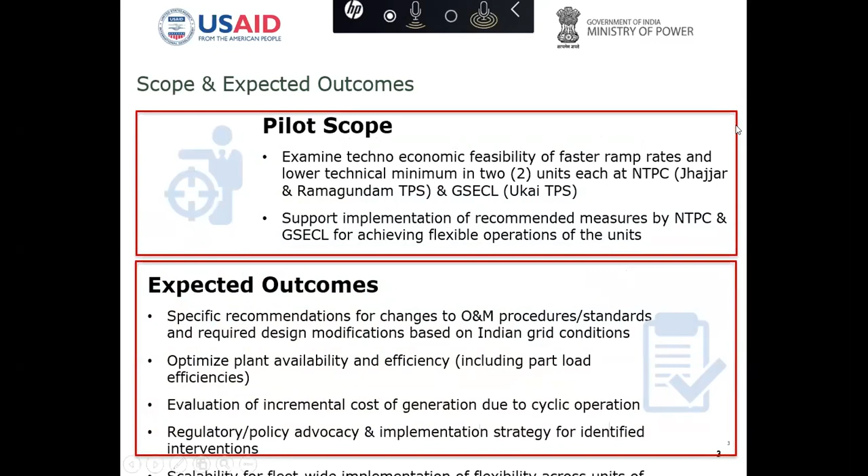We started the pilot long back in 2017. The scope of the pilot was essentially to look at the techno-economic feasibility of a couple of units at NTPC as well as GSECL. We identified a 500 megawatt unit at Jhajjar and a 200 megawatt unit at Ramagundam for NTPC, as well as a 200 and a 500 megawatt unit at the Gujarat State Electricity Corporation, that's GSECL.

The objective was to look at how these units have been run over the last 10 years, what damage has been inflicted because of the operational procedures taken up by the teams. And going forward, if these typically 200 and 500 megawatt subcritical units are subjected to flexible operations, what kind of damage is foreseen? What are the costs associated with those damages? And in a regulatory environment, how can we address those costs for the utilities. So that, in a nutshell, was the overall objective.

And then, of course, coming back once we find the recommendations, we had to support NTPC and GSECL, which we have wholeheartedly done with fantastic support from both utilities over the last 3 years. This webinar, in fact, happens to be the third webinar in the series of this pilot.

As I mentioned, the outcomes were primarily related to what kind of operational changes you would foresee in running the units during flexible operations, because that's something Indian coal-based units had not been subjected to so far. Going forward in the near future, when you have a large ingress of RE capacity into the grid, coal-based units would be required to flex up and down, maybe do a two shifting also during a week. So that's where we looked at the kind of procedures that would need to change.

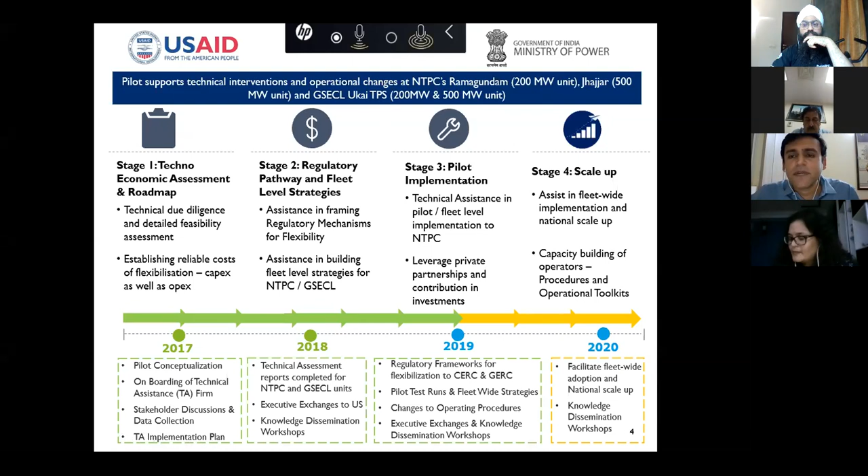Anuj has already mentioned that this trial was a 3-year journey. We started during February '17, and then this MOU was signed, and we have shared 10 years database with USAID as well as Deloitte team. That was analyzed by the Intertek team, and Mr. Doug and one more senior person analyzed all these things.

But initially, what was the issue with us actually? We are not confident how to run these units at low load. Our technical minimums are almost above 70% for all of our units. And normally SLDC or the load dispatcher also don't advise us to go below this.

So this was, we can say, a test we have not carried out in our routine operation. And now for the last 2-3 years, we have seen so many changes in the grid operation also. We are facing so many difficulties because of this highly erratic tendency of wind.

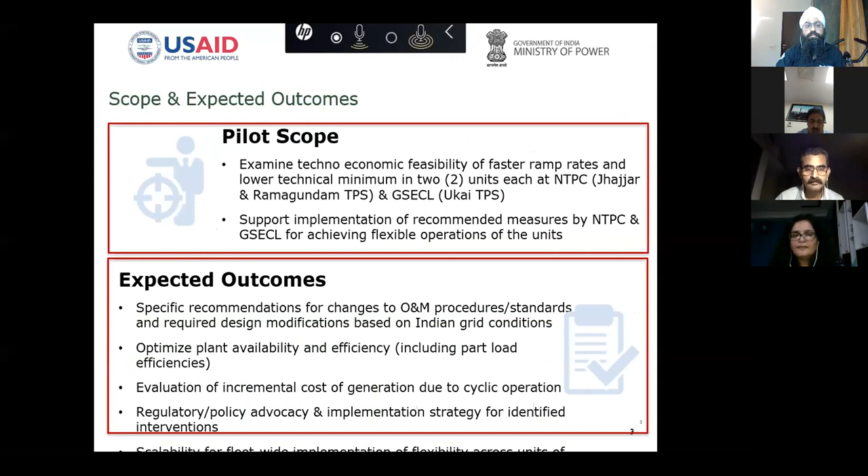All this exercise has developed a lot of confidence in our people that we can run this unit without oil support up to 40% and 55% loads.

One more thing, the Deloitte team also made a presentation to our regulatory officers regarding the damage these machines are incurring on account of these fluctuations, and what should be the compensation. It was a good presentation, and the regulator agreed that they will consider this compensatory mechanism in our ensuing multi-year tariff petitions. This was very good support from their team, so that we can quantify the losses and how we can get the compensation.

We were not even aware of the quantification, how much losses we are incurring while load following or start-stop operations. With support from USAID, Deloitte and the Intertek team, we were able to quantify these losses and put this up to our management, that we are incurring so much losses in this process and we have to avoid this. So again, this was a very successful exercise for us.

We have developed a lot of confidence and awareness among our people. And once again, I thank all of these people who are associated with and who have guided us in this exercise. Thank you.

Thank you, Monali, and thank you Mr. Michael, colleagues from GTG, all the participants, Mr. Banerjee from NTPC, Mr. Gandhi, and all the colleagues from GSECL, from NTPC, I think from Adani, Mr. Nikhil from Intertek, he's also there, I can see him. So good evening, everybody. Let me upload the presentation.

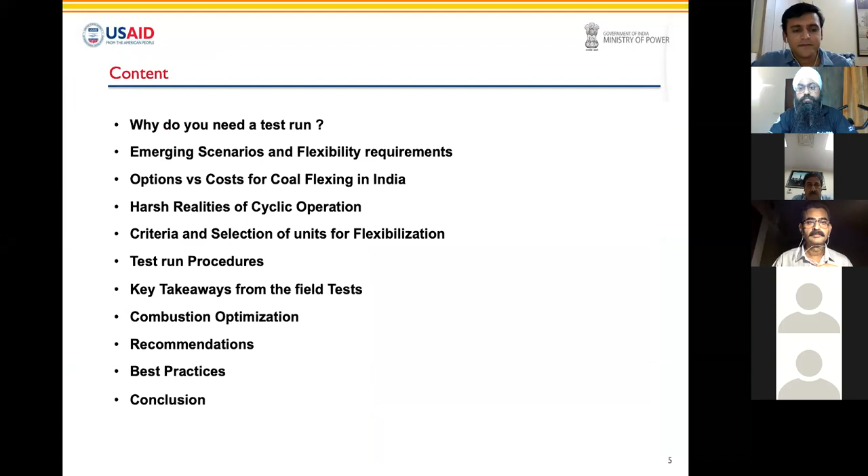Okay, these are the things that I'll cover - why do we really need a test run. Because there are a lot of questions. Even before the webinar, I received a lot of questions from I think 4 or 5 different people, and I have tried to answer all of these, and whatever will be left, we'll answer in subsequent discussions. I will send it personally.

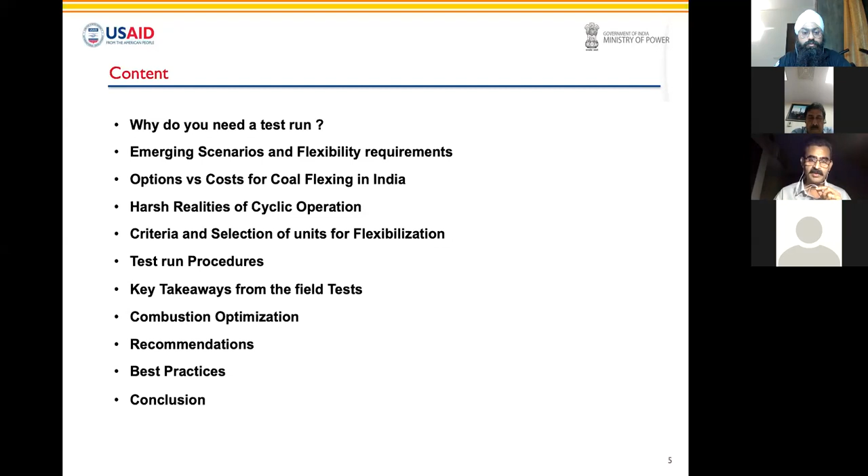Let me start my presentation by throwing a few questions. Why do we really need a test run? Many of these will be an answer to itself - these questions in themselves will answer many of your queries. Reflect upon these, and whatever is left will be answered as I walk you through the subsequent slides.

First, what happened during the 9 p.m. on 5th April. It's widely being acclaimed as a very successful grid management, but from the perspective of the coal plant generator, you really need to think hard. If you want to be relevant, you have to introspect, because that was an opportunity for you - a God sent mock drill opportunity on which we have not been successful.

Because everything was managed by hydro, even curtailment, which is not a normal thing - curtailment of wind. So it's high time for the coal units to act now, and you have to prove the reasons for your existence by playing a greener role.

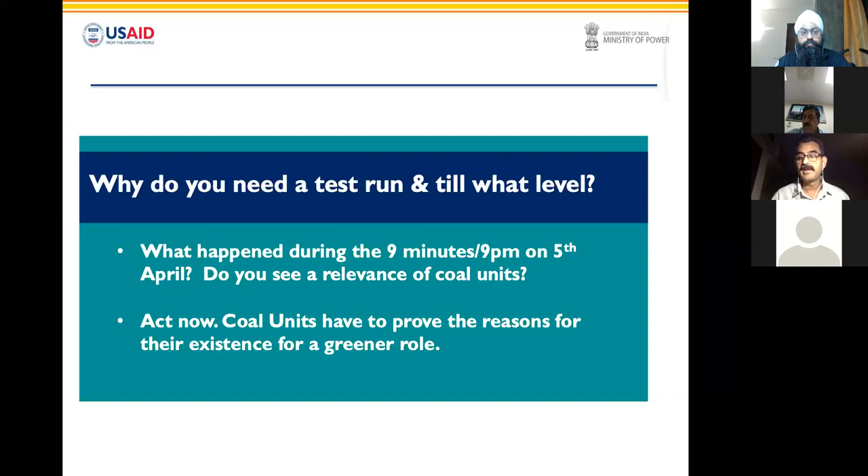So these are some of the questions asked by the participants. One is, what is the future of coal-based thermal power plants? Everybody is questioning coal, so I'll explain what is the relevance and why do we need coal. For the coal generators also, they have to again explain and understand the relevance and what are the new roles that they have to play in the future.

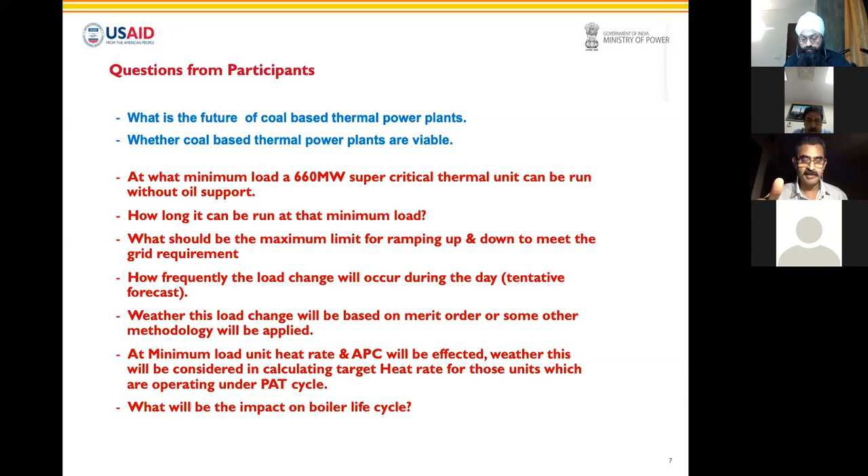There are other questions, more specific to the stations. Many of these answers I have in my slides, and some I'll answer later on, because in one session I may not be able to answer all of these as they constitute a lot of other things.

So the first thing is a scheduling effect of running an ISGS station. This is one example of one day, 20th April 2020. See the way the units are being scheduled and the way it is being run - this is by the economic dispatch, the SCED mechanism. So I question, is it really an economic dispatch as claimed by many?

See what is happening here - there are different cycles, more than 13, I think if you count it's 15 to 16 different cycles of load following. But I'll consider only the significant ones. First, here there was a 30% down, 15%. Here also it was very high, and then to a minimum load, almost to a minimum load, stayed on for quite a long time. Here 43% down, and at 2% ramp rate.

Again, we increased it for a very short time, and then again it was decreased. So this is the way how you are being scheduled.

So there are certain questions - I see there's a cost to it. There are a lot of damages happening in your machine. And if you see in terms of cost, every significant load following - meaning when the load swing is around 15 to 20% and at a very fast ramp rate - the cost is more than 2 lakhs.

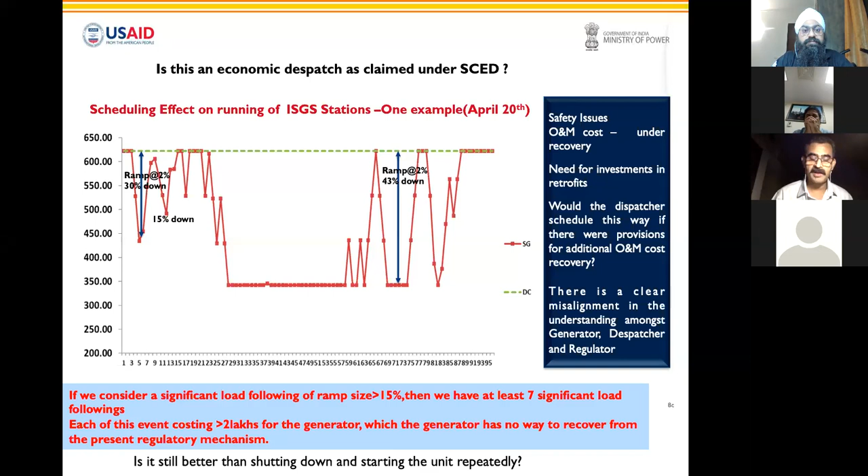So this is popularly known as the Indian duck curve. And when we see the duck curve, this is the demand. I think this is a very well-known curve and all of you must be aware of this. This is for one particular day of 2022.

We are taking the worst scenario with the addition of 175 gigawatt of RE. Previously what I had shown in the dispatch, that dispatch was due to SCED. Not all the stations are operating in that way, but the mid-merit stations are operating that way. So typically on that day, this would be the way the coal units would be required to operate: in the morning, 104 or 106 gigawatt, again in the afternoon 33 to 34 gigawatt, evening 118 gigawatt.

So most of these would be delivered by coal, because we still don't have enough hydro capacity. On a normal 9 p.m., 9-minute duration, it was a prepared sort of thing, so all the hydro stations were made to run and coal stations generation was reduced beforehand. So that was not really a mock drill. But in normal circumstances, hydro may not be on bar, there may be some spillage problem, and gas won't be available for meeting this.

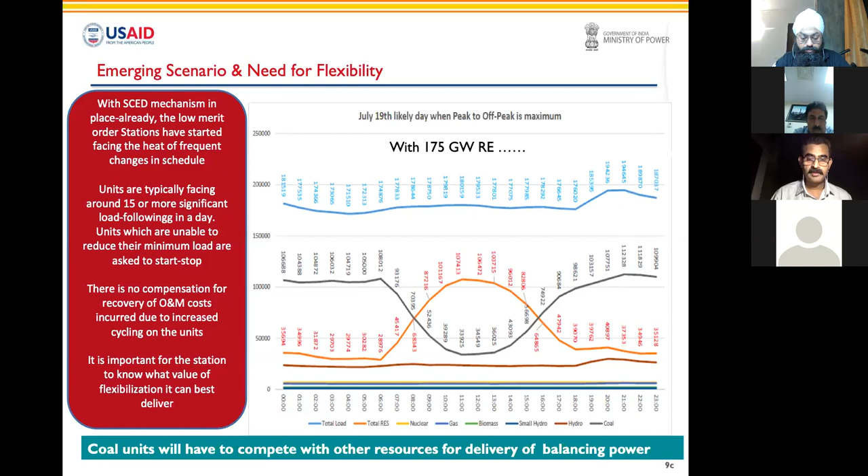Now for the coal stations, you need to understand that you sustain and remain relevant because of your cost. Still, coal is the cheapest source. The next slide will explain this very well.

So this shows the different ways this balancing power can be provided to the grid. And everything will depend on the cost, on the economics.

So last month, I think end of February, there was an auction by SECI in which RE plus storage was offered in a two-part tariff, one for peak and one for off-peak. So the lowest tariff was 2.88 with storage. Now coal has to compete with 2.88, and coal means the marginal cost of production from coal units. Presently we have prepared this based on the present price, but this will change very rapidly.

There are many options in which grid balancing can be done, from the system operation perspective, from the market, from the load. The worst thing in the load is load shedding, which has been widely done in the past. From the flexible generation point of view, hydro is the cheapest, no doubt about it, followed by gas ramping. But unfortunately in India we have very limited gas capacity, so most of this has to be done with coal. And if something becomes cheaper than this, then coal won't get dispatched.

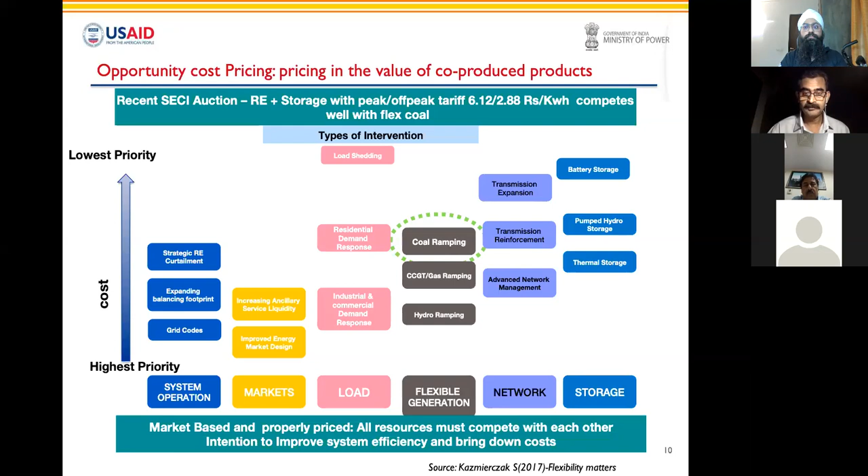Before we run through the procedures, I'd like to explain some realities of cyclic operation. First, flexible operation is a difficult mode of operation. It's not easy, otherwise we wouldn't have assembled here with lots of talks happening, because it's a migration from base load to cycling. All the operators, all the plant O&M staff had been trained for base load in the past. But things are changing so rapidly. Now you need to change yourself, the entire range of operating procedures, the way you operate in the market, your financial models—everything is changing on the ground. And in fact, it has changed.

But in fact, every unit can be cycled, and it can be operated with minimum impact with certain interventions. You need some retrofits, some changes in procedure, and training.

The first thing is that awareness must be there, and flexing with lack of awareness can be disastrous. This is what is happening in many stations. We had seen, in one station we visited, a complete collapse of the bottom ash, with an explosion in the bottom ash area, causing a lot of damage. I have a lot of these pictures which I haven't put here, but later I can share with you—damages in the boilers, boiler tubes.

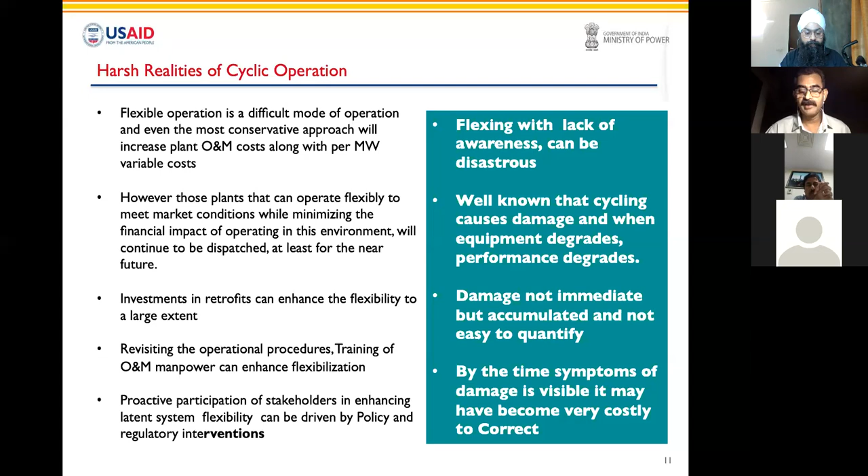So this is another famous curve that everybody uses to explain the mode of operation, the damages, and the cost. This is from Intertek, but I've added the cost component to it. You need to understand this very well.

This is the different mode of cyclic operation. One is load following—LL1 means mild load following, LL2 moderate, and LL3 significant load following. We are not concerned much with mild load following. What we are talking about is significant load following.

The cost of one significant load following event, for different sizes of unit—I'm talking about a 500 megawatt unit—varies from around 1.95 to roughly 2 lakhs. This is what I had shown you in the previous slide.

Next is the hot start. Damage is more than load following—here the cost is 20 to 38 lakhs. The cost is not fixed; it depends on the unit, it depends on how you operate it. For example, one operator can cause around 15 to 20 times more damage than another. A very good operator with good operating practices and some good automation in the plant can minimize your damage. So this is a range of cost I'm showing.

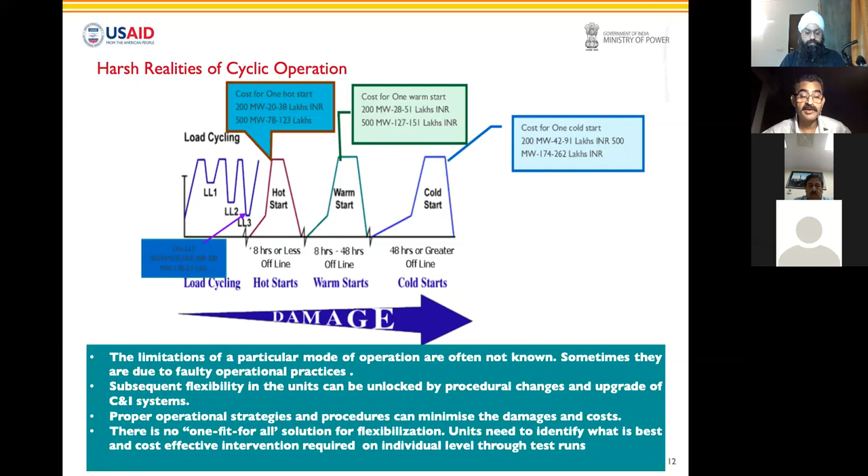After that, you need some changes in control and instrumentation, like replacing the whole thing, modernizing your control and instrumentation, putting some automation, like automatic start of mills and other things. Those solutions also I'll show you in my subsequent slides.

Then last is your digital fleet-wide monitoring. Typically, if you have say 3 or 4 units in a stage, you get a schedule stage-wise. With optimization of the fleet, you can reduce your cost damages by selecting one unit and increasing the load on another unit. Here also, NTPC has a center called Antariksh, where they try to optimize their fleet.

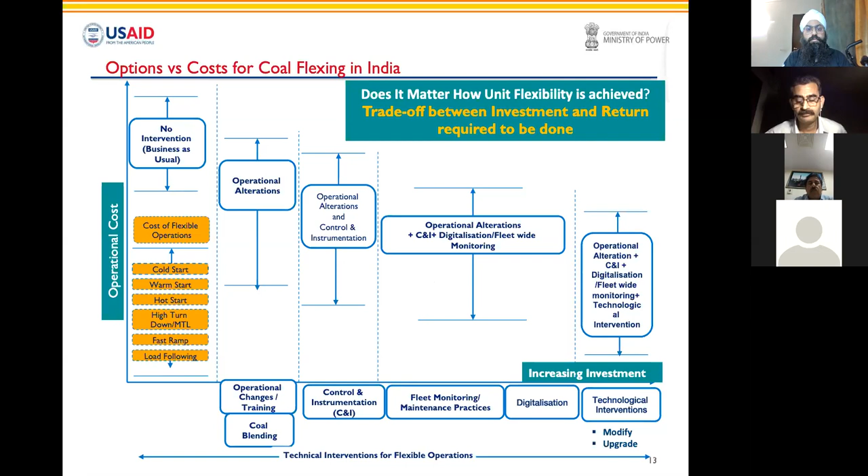So as you go from here to here, your investment cost increases. You need a one-time investment cost to put in all those things. Now you need to decide for your unit what value you can provide best, what would be best for the power system, and what would be the best in terms of value to the generator.

So we had done some analysis in CEA. Based on this regulated tariff criteria, we had selected some units depending on three, four criteria: on ECR, energy charges, then your GCV of coal. Because if GCV is very poor, you cannot go to lower load. We have selected as 2800. So whether you want it or not, you have to run these units on base load.

Or the unit will be in shutdown, or maybe you may be required to retire those units. So these are the criteria, and you need to decide where you stand. In fact, we have selected units, and we have the data for each and every unit in the country, on which mode and which value of flexibilization can be best provided for that unit.

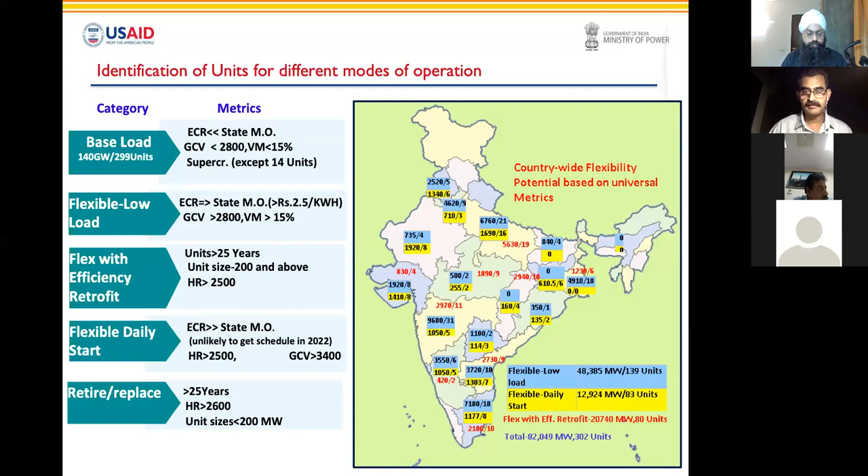So now coming to the test procedures. The objective was to check the ramp rate, ramp up, ramp down, what was the old and what was the new. Everything was done very gradually in very small steps. Initially, when we started, we did it in very small steps, 5-10 megawatts. Then we waited for the parameters to normalize, and after stabilization we moved to the next level.

Then the other objective was to see what is the minimum load possible for that unit on a standalone basis, and then what can be the minimum load with retrofit, with tuning of control loops, and then with some other interventions.

Again, we tried to identify the process limitations, both thermal, mechanical, and even C&I systems. Check what is the effect of aging, many of the actuators and other things, what is their response. Then we evaluated the operational practices of the unit, the existing ones, and how we can change that. And then identification of retrofits for those plants.

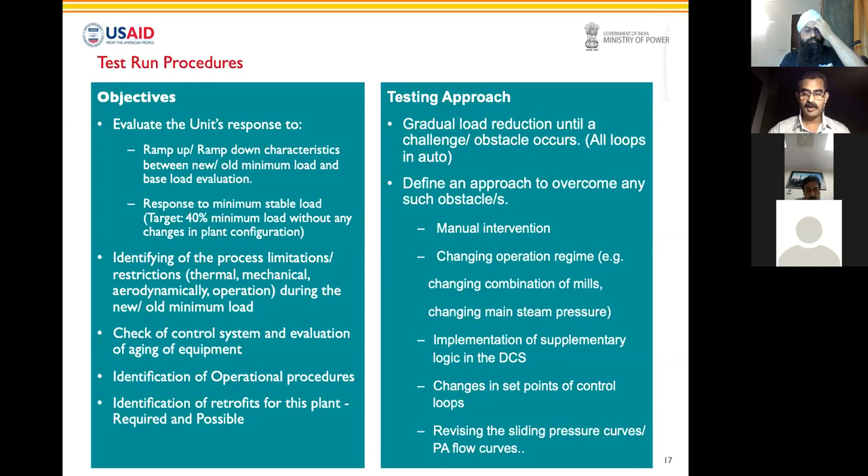Another thing was revising the sliding pressure curves and the PA flow curves. They should be done after carrying out the test runs, because while going to a lower load, we found a lot of problems like economizer steaming and other things.

So these are the expected issues that can happen whenever you carry out a test run. This is a general thing. You can do it based on the procedure and carry out test runs on your respective units. Combustion is a very common thing, and what needs to be done I'll tell you in my subsequent slides.

Drum level control, that is also very important. And there can be problems with TDBFP. Typically, TDBFP recirculation valves in many of the units are on-off type, either full open or full close. That had been done to reduce the passing and other problems for reasons of efficiency. But now we are replacing all those with inching type, control valve type.

Hot reheat steam temperature - everywhere we carried out the test run, we found there was overshoot of HRH and MS temperatures. Flame scanners. Then there can be stalling in PA fans.

So when you reduce your load, you don't take flow from the PA fan but still maintain the pressure in the PA fan. There can be incidents of stalling, and it can be very severe. We have seen situations of stalling where the whole blades have been damaged, the roof was broken, the fans just collided with the roof, the flange blades, and they come out of the roof.

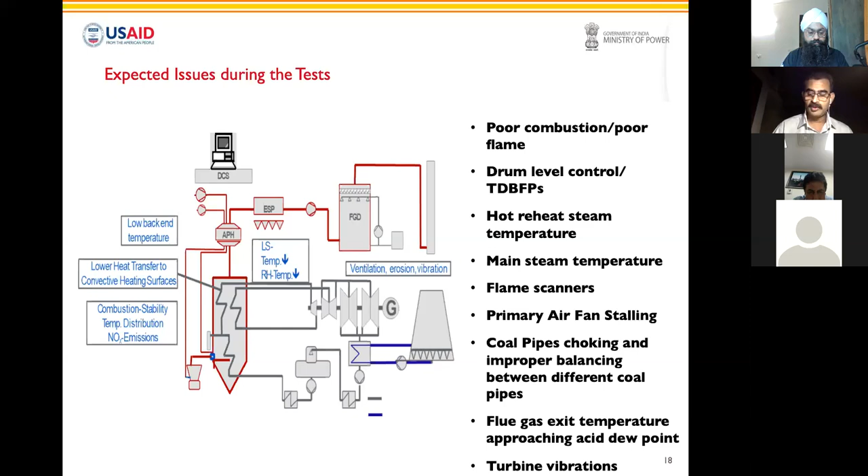So this is the description in the units. It was a common BHEL make unit. What you need to see here is the coal quality. People talk a lot about the coal quality, because Indian coal is poor, and people often say that with this coal it's not possible. People just give the judgment that no, 40% is simply not possible.

But I'll show you that we carried out the test runs in 2 of these stations. The coal GCV was in the range of 2700 to 3930. There was wide variation - on an average it was 3000, even at 3200. Typically at Ukai, when we did the low load test run, the coal quality was around 3000.

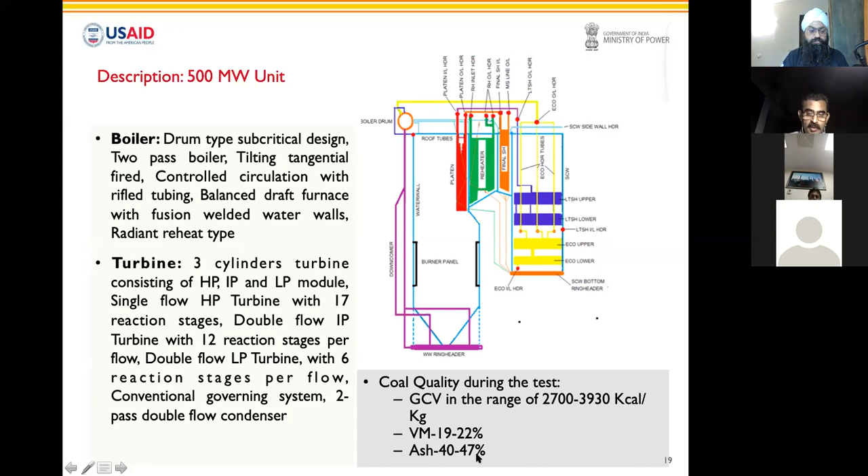VM, volatile matter, was in the range of 19 to 22, and ash 40 to 47. This is nothing new for the Indian coal. So other things, it's just the turbine design.

So these are the field tests that we did - from 500 megawatt to 198 megawatt load reduction, and back with certain hold points.

We waited there with hold points. We waited for at least 2 hours. We took the readings and then observed what can be optimized, what are the process limitations.

Then in Ukai, the whole data was connected to the BHEL back office. BHEL means EDN Bangalore. So they were also analyzing at the back end. The design team was there.

So in different steps, from 500 to 360 megawatt, there were 5 mills. 360 megawatt to 300, 4 mills. And then last, when we reduced from 275 to 198 megawatt, there were only 3 mills, CDE. And the stations were very reluctant in reducing the mills from 4 to 3.

And this is one of the most important things that you need to note. I'll also be explaining in the subsequent slides the importance of this, because if you're afraid about what happens if a mill trips, what happens if something happens, some foreign material comes in - you need to understand that you are only increasing the probability of your unit tripping.

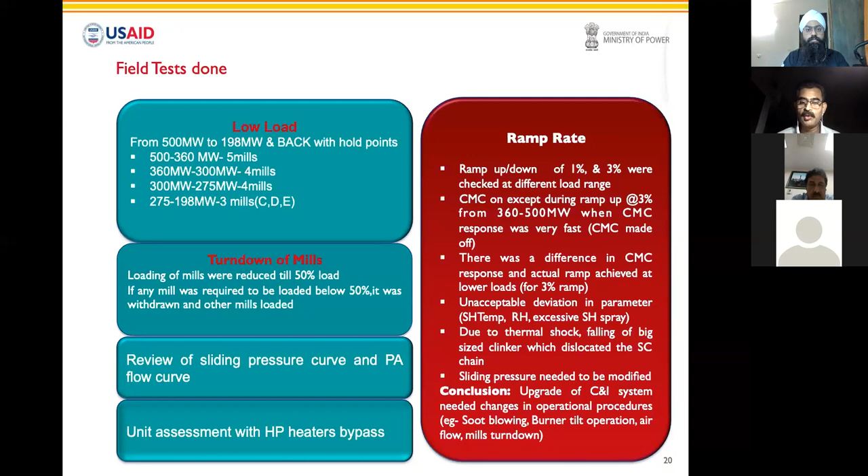So some of the issues I discussed. When we were reducing the load, some things happened. One was the wind box pressure collapsed. We had seen this in Mauda also, we had seen this in Ukai also. One reason is you don't have a measurement for your individual secondary flow through individual burner. If you're able to incorporate that, it would be a very good thing for the control. And unless you have a measurement, you won't be able to optimize things.

So what we did is we closed the secondary air, even the primary air of the mills which were not in service. We reduced it, because for the burners you need to keep some airflow at least for burner cooling. So by reducing these dampers and the unwanted flow, we were able to improve the wind box pressure, and we could see the improvement in the flame also.

Then there was high superheater spray, reheater spray. One reason was that the reheater burner tilt was not in auto. Then there was a passing in the reheater and the superheater, both in one station. Feed water, when there was a changeover at lower load, we could see a jerky operation because the recirculation valves were of on-off type.

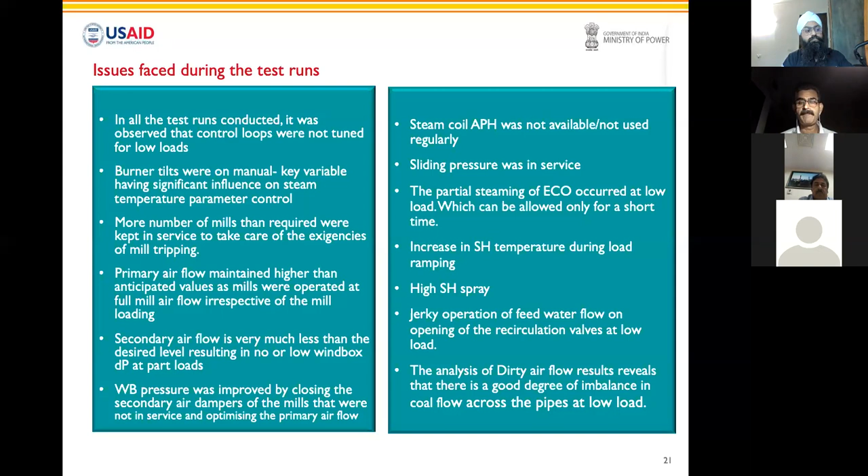There are solutions of variable orifices which can be put on auto and hooked into your control system. Because when you do settings of your orifice, you do it at a base load. You put on a stable load and then you set your orifice. But with the changes in the airflow in the mills, change in the loading with unit load, all these things get changed, and there's an imbalance in the airflow across the coal pipes.

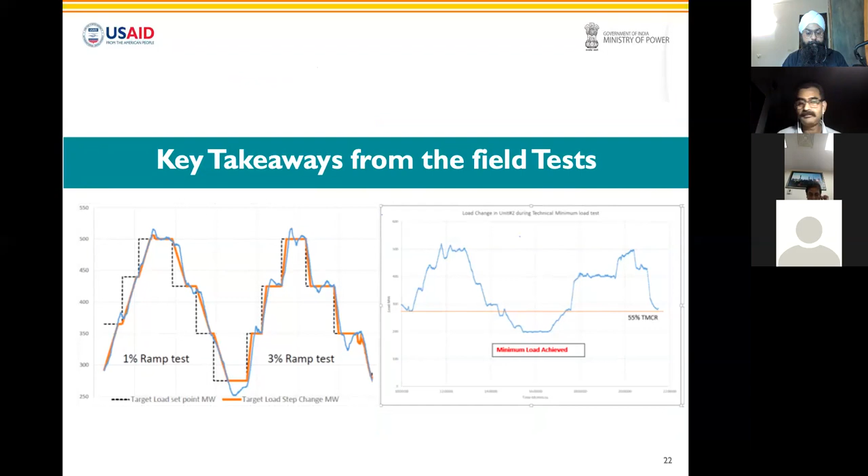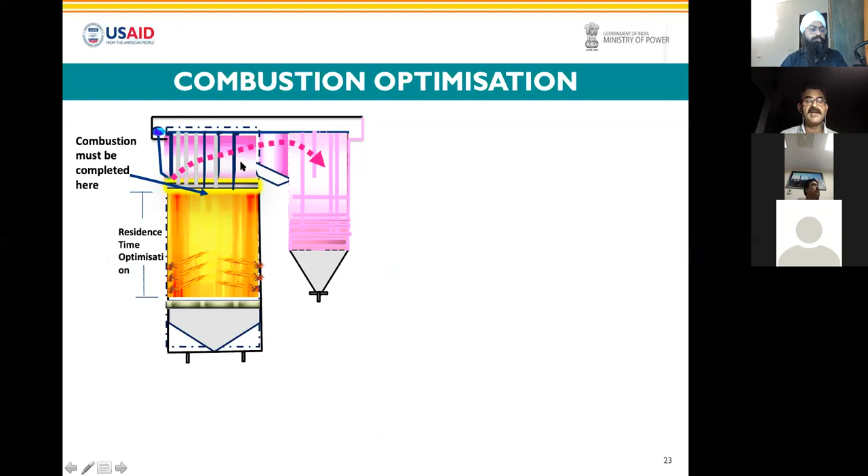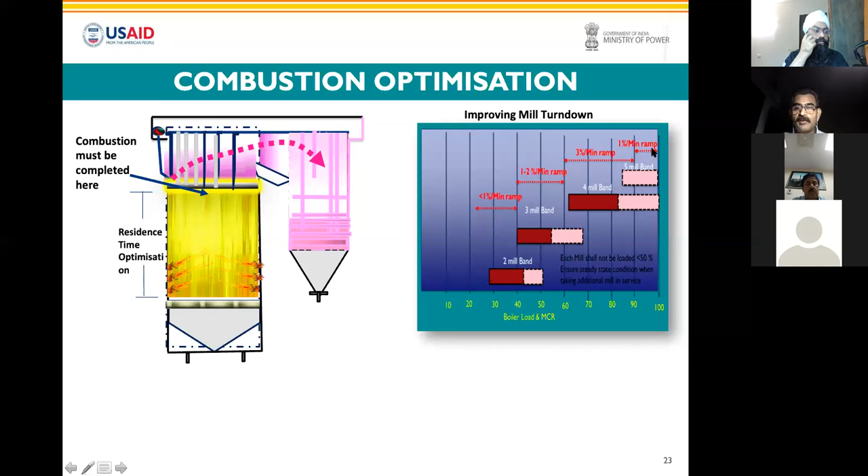4 mills for this load range, again 5 mills at say full load. And this would be the typical ramp rate that will be achieved at different loads. Here the ramp rate is lower because if you keep a high ramp rate, there may be a problem of overshooting. So this is not rocket science, this is for regular operation. All these things you need to take care of, and all of you are aware of these things.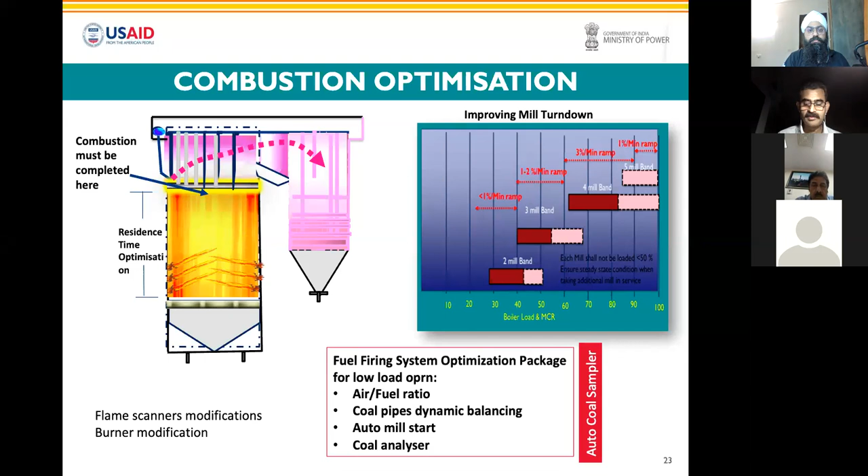Before we proceed to what solutions were provided for the test run, you need to understand combustion. First thing is for fuel air ratio, you need to comply with the NFPA guidelines. NFPA 8502 requires that the airflow is maintained at or above the purge rate, which is not less than 25% of the full load mass airflow. This is very important for safety, and this holds good even for your individual mills. So even in the individual mills, you need to maintain the air fuel ratio. Otherwise you'll have problems like mill explosion.

And for the furnace, all of you know this, but you need to remember it even more when you go to a lower load: never add any air in a dark smoky furnace. This is very critical. Air fuel ratio is very critical for the safety of the boiler. And all these things will be in auto because manual operation is very difficult and it is not recommended. So we have solutions, in fact NTPC is implementing some of these solutions, like with a mill scheduler, how to optimize these things.

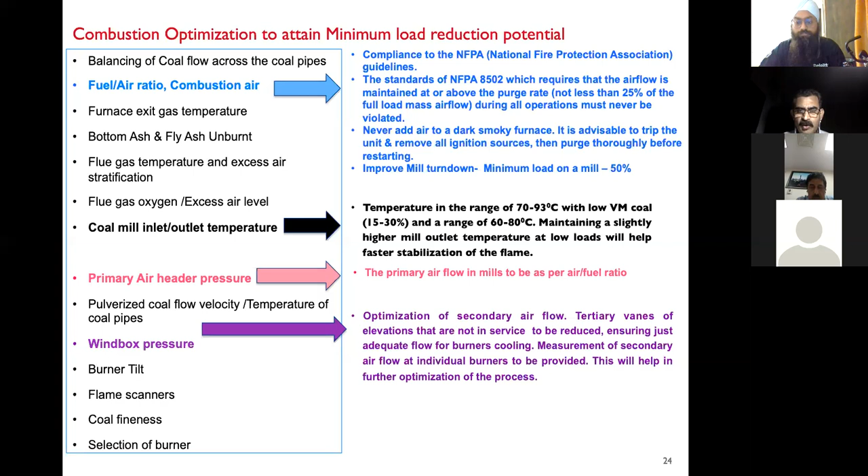So some key takeaways from the field test: sliding pressure, that needs to be modified. BFP recirculation valve, this needs to be replaced.

Again, measurement of excess O2, this is very important. Many times you have leakages from different places. So O2 measurement, say typically during the test procedures, the O2 was kept at around 5 to 6%. But somewhere you can go wrong. So it is always a good idea to validate this with a CO measurement, because CO is unaffected by air leakages. So both these two together should be considered for review of the level of excess air that you have.

Another important thing is why we were reviewing this response of the C&I system at low load. Typically in the original engineering specs, when the plants were installed, they aimed at automatic operation in the load range of 60 to 100%. So they operate very fine in this load range; control is very good. But when you reduce this, they all fail. One reason is because many of your actuators don't have margins left, so the response at lower load is very poor, and sometimes it's very sluggish. You need to replace some of those actuators also to give a better response at lower load ranges.

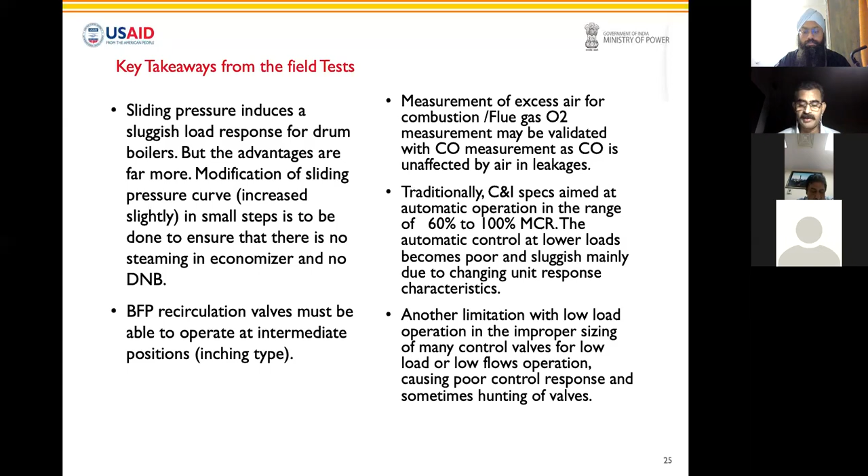So the C&I system is one of the most important things apart from the operational procedures: fine tuning of CMC logics, MS and reheater flue gas temperature control, then unit control with automatic mill operation, mill scheduler. You can learn from NTPC, they are implementing these things. Siemens had done the test run in Dadri, I think in late 2017, and now it is being implemented there. So that experience of NTPC will be a very valuable input for the rest of the entire sector, I should say.

Then boiler lifetime monitoring, this is also very important. Tomorrow you'll be operating in the market. The reason I started my presentation with those slides is to make you understand that you are operating in a market where you don't have much of a choice; you are forced to operate that way. So you have very limited choices, either to operate, stay relevant, or to shut down. And if you are forced to operate, you're not going to lose money, but if you don't prepare yourself, you'll be out of business very soon, because your O&M cost will increase manifold and you may not be able to recover that money from the market.

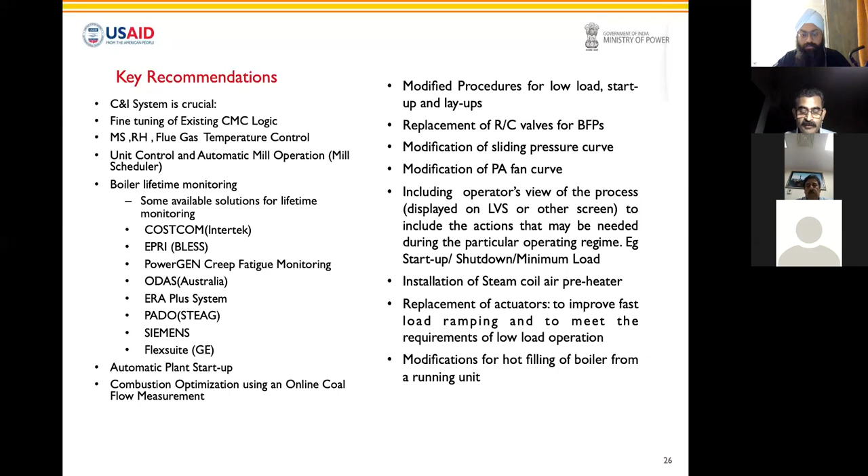Some of these best practices which you have seen have been installed in India. Condensate throttling is one, at NTPC Dadri. Then we have advanced process control, which is implemented at Simhadri, and it is in testing.

Then there's another solution, plasma ignition system by GE. As per the claim, this can burn any category of coal, and you can reduce the minimum load of your unit by even 10%.

Then these are some other solutions. From GE also we have digital boiler plus low load advisor, which is a host of things that will be connected to the entire unit and will guide you through the process. In Europe, in some stations, they are exploiting the storage capability of the mill by adjusting the roller weight on the rollers - in a short period of time, they adjust the output from the mills.

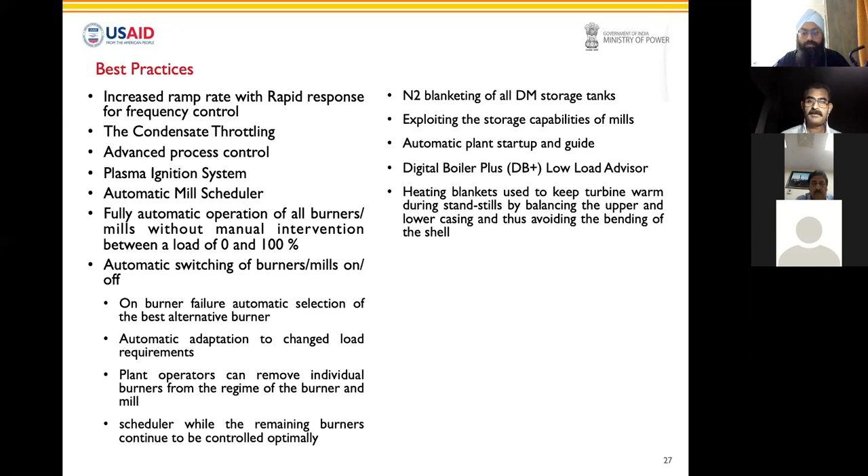Okay, this is the last concluding slide. In fact, it's not a conclusion, because things can never be concluded in flexibilization - it's an ongoing process. So for supporting 175 gigawatts of renewable integration, coal units are required to run in increased cycling mode. This is well acceptable, and there's no doubt about it.

So units will be required to identify the best value they can provide to the power system. Each one of you needs to identify what is best for the unit, what is the best value that you can deliver at the lowest cost. And there is no one-fit-for-all solution for flexibilization - every unit is different. That is why we need the test run. Ideally, you would need a test run for every unit to decide the limitations of that unit, and what are the specific interventions for that unit.

However, you can implement the test run of one unit on other similar units of similar make, similar vintage, similar historical operation, like one BHEL unit at Dadri or Mauda. The other is also very similar, although testing was done in both units, but they were not exactly true copies. There were some deviations, but the solutions can be copied.

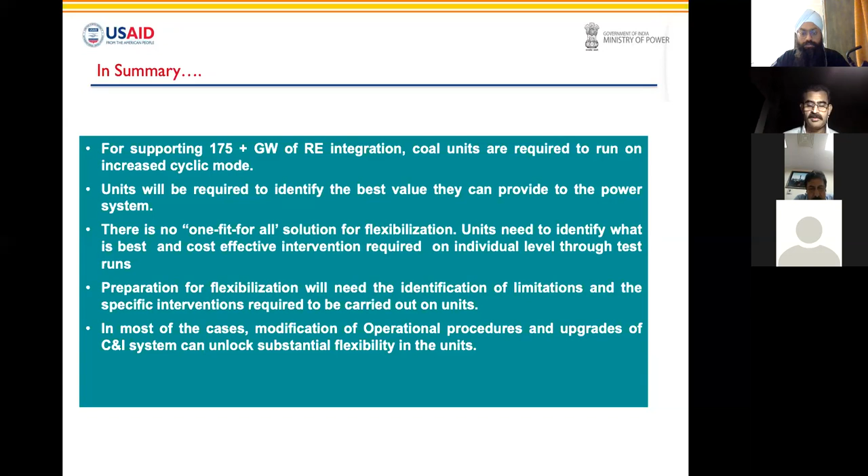And lastly, operational procedures are very important, and we have prepared detailed operational procedures from GTG, which will be made a public document very soon. That's all. Any questions?

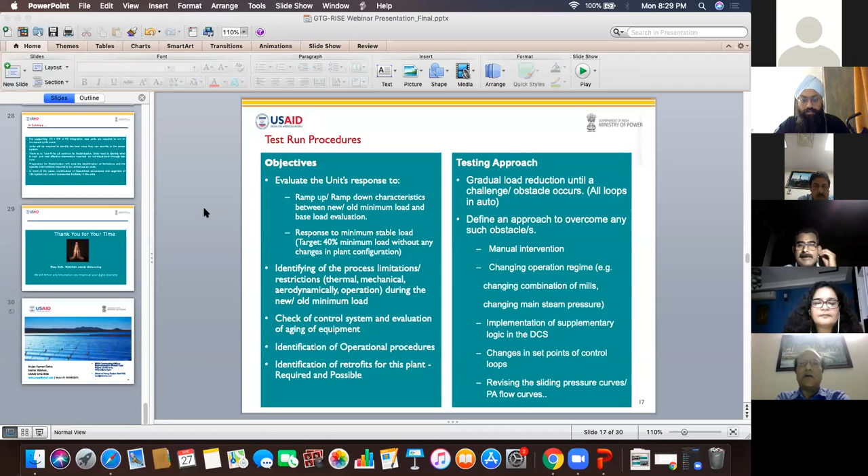And the points Mr. Gandhi had raised and Mr. Anjan Sinha had raised are very relevant points we are facing nowadays. We have also undertaken pilot studies in 2 to 3 cases in our Mauda units, Dadri units, and Vindhyachal units, and at the end of the pilot, we came out with the same observations as in Gujarat, Mr. Gandhi -- the temperature aberrations, steam temperatures, metal temperatures, and drum level fluctuations. These are the key issues which are to be addressed basically.

So this pilot study being successful does not mean it ends here itself. It is a start basically. From now onwards, we have to take multiple initiatives together so that we can run the units at higher ramp rate, at minimum load, without any major variations or aberrations of important parameters. That is our objective. Only then at the end can we say that we are successfully running at minimum load of 40%. So it is a misnomer sometimes that we can run the units at 40% with the present conditions -- no, it is not so. Maybe we are running for 2 to 3 hours without any major deviations, but we cannot run it for hours together, for days together. So to make it happen, we have to take multiple initiatives.

And the initiatives Mr. Sinha mentioned -- so many initiatives in different packages suggested by different agencies worldwide -- they are popular. In fact, we are going forward with some of these initiatives in 2 of our units presently, one at Dadri and another at Simhadri. The objective basically is to have higher ramp rates at minimum load.

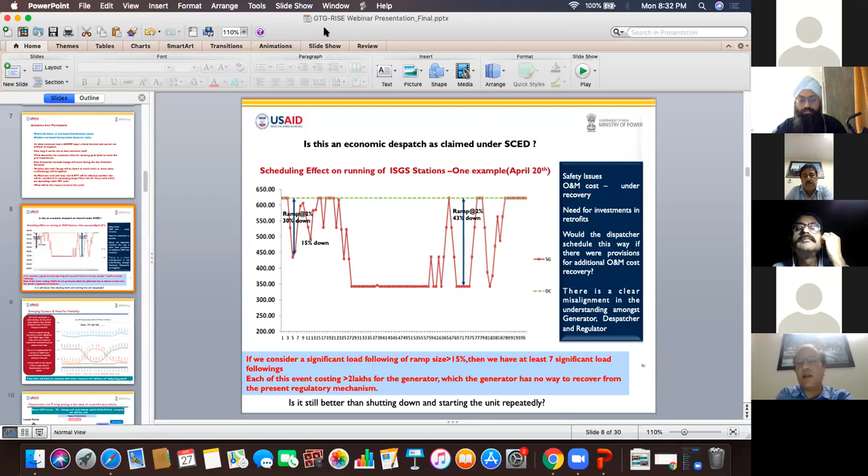Coming to our observations on that particular day, 9 p.m., Sinha ji, you'd like to know that our central GS stations, particularly coal-based stations, had contributed immensely with respect to primary frequency response, and all of our units almost performed exceedingly well on that day. Power grid had managed it well with other means, say hydel and gas, and with some support of coal. Our performance was not that bad on that day even. So that is one point I would like to raise.

Coming to the 40% minimum load, I want to elaborate here to the audience that in a two-prong approach we are taking, one at Simhadri, where we mainly concentrated on control logic optimization, advanced process control, where these logic loops are acting on a reactive basis. That means when the temperature goes high, then only it suppresses with spray.

But the advanced process control is basically a smart control. That means even before that happens, it can act. That is basically a proactive means of control. So we think that with this approach, we can be much faster with minimum deviations that we have to see at Simhadri. In fact, it is under demonstration and under tuning at present. Maybe within 2 to 3 months it will be implemented.